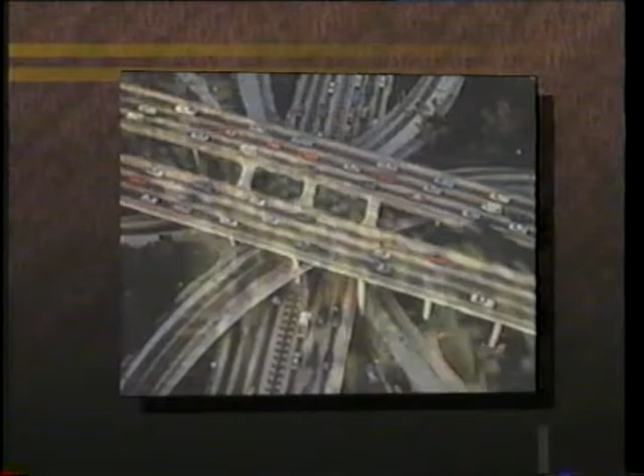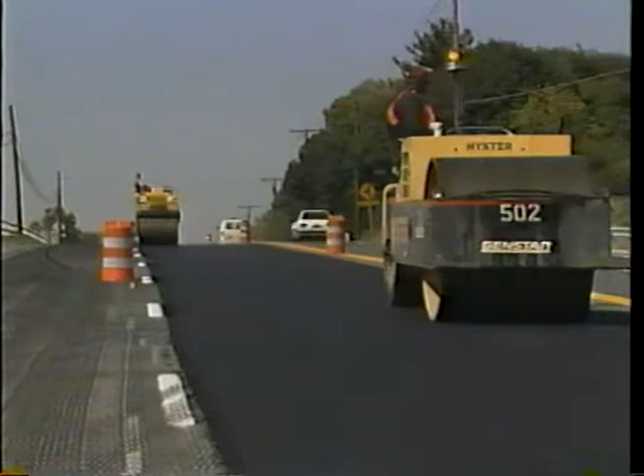For nearly a century, highway agencies and paving contractors have been constructing roads of hot mix asphalt, and with good reason. Asphalt pavements are smooth riding and long-lasting. Today, there's a new set of tools and techniques called the Superpave system that allows us to design even more durable asphalt pavements. Superpave, which stands for Superior Performing Asphalt Pavements, is the mix design system for the next century.

The Superpave system has two key components: performance-based asphalt binder specification and volumetric mix design and analysis. It also uses an improved method of laboratory compaction that reflects field conditions.

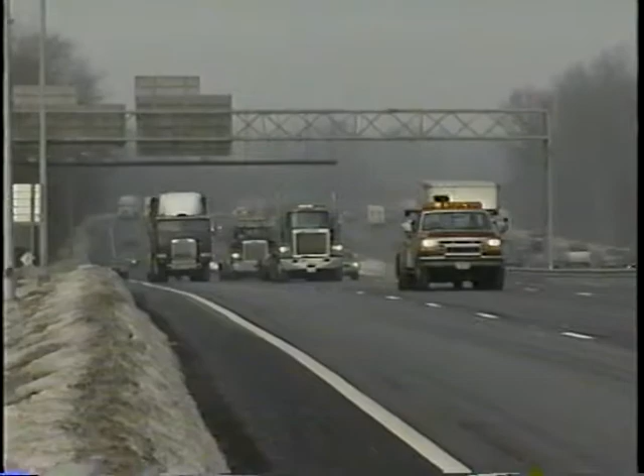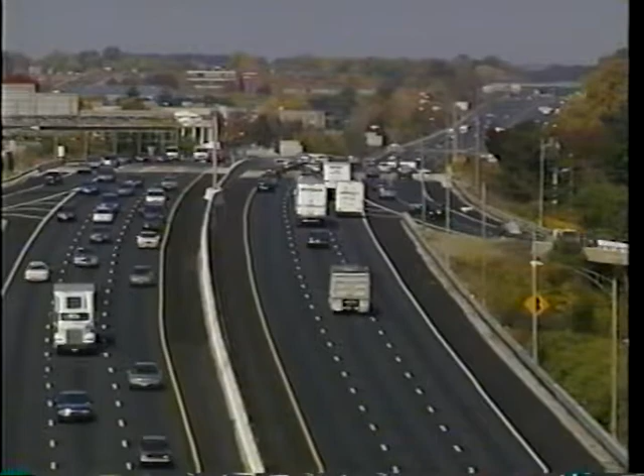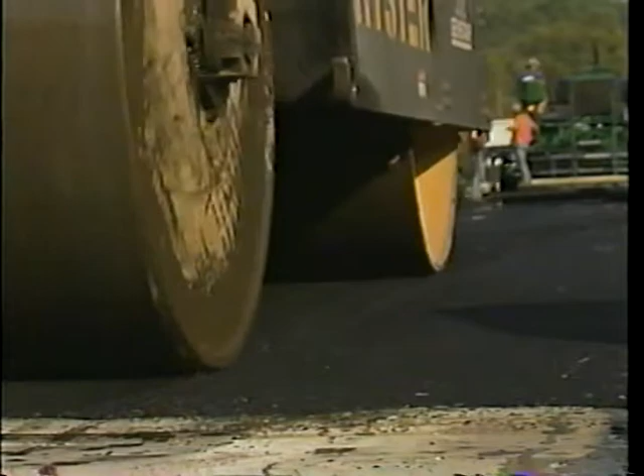Pavements take quite a beating. Not only are they subject to ever-increasing traffic loads and volumes, but they also must serve in a wide range of conditions. The Superpave system incorporates a new binder specification that classifies asphalt binders into performance grades based on a range of climates and pavement temperatures. The specification sets certain physical properties that all binders must meet, but the temperature at which those properties must be attained is determined by the specific climatic conditions at the paving location.

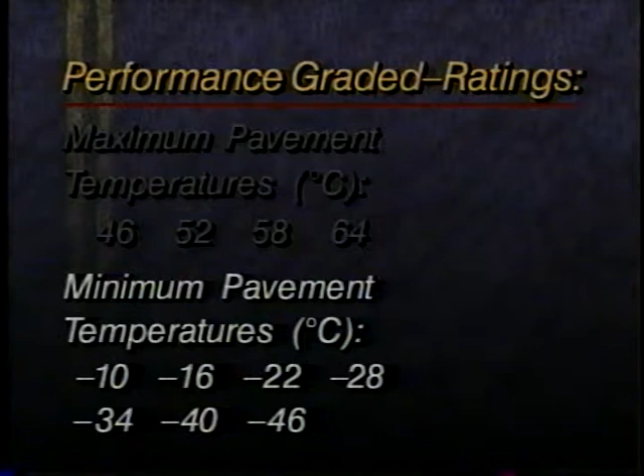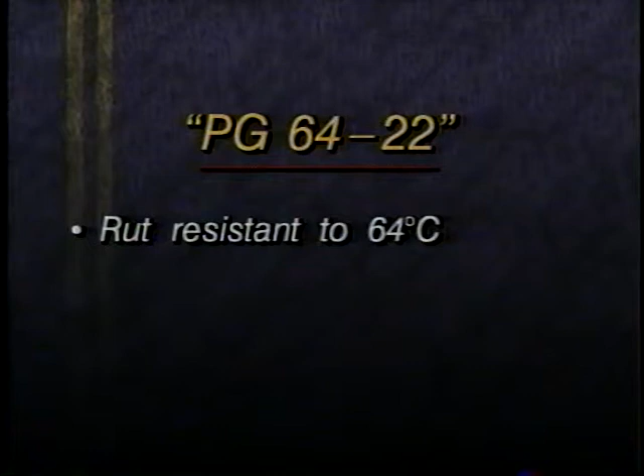Superpave binders are classified by PG for performance-graded ratings. The rating contains two numbers indicating high and low pavement temperatures. For example, a PG 64-22 binder used in a Superpave mix is expected to be resistant to cracks and ruts at pavement temperatures as high as 64 degrees Celsius and as low as -22 degrees Celsius.

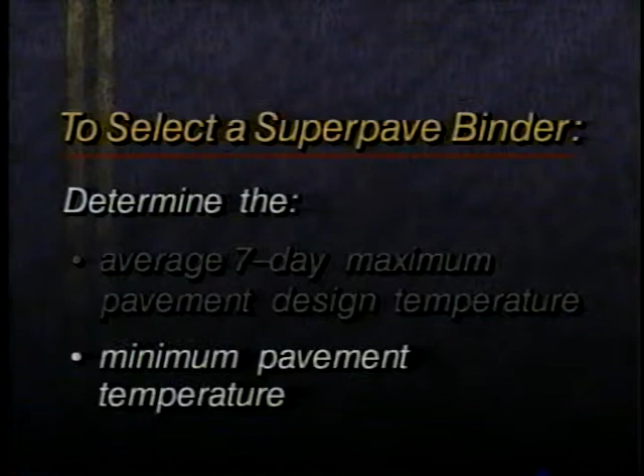To select a Superpave binder, you first determine the average 7-day maximum pavement design temperature and the minimum pavement temperature for a particular job site. To make this task easier, a weather database with more than 6,000 weather stations is included in the Superpave system. For pavements in extreme climatic conditions, some asphalt cements may have to be modified. But modified or not, a PG binder will have the required properties to perform as expected during the pavement's life. This is what is meant by a performance-based specification.

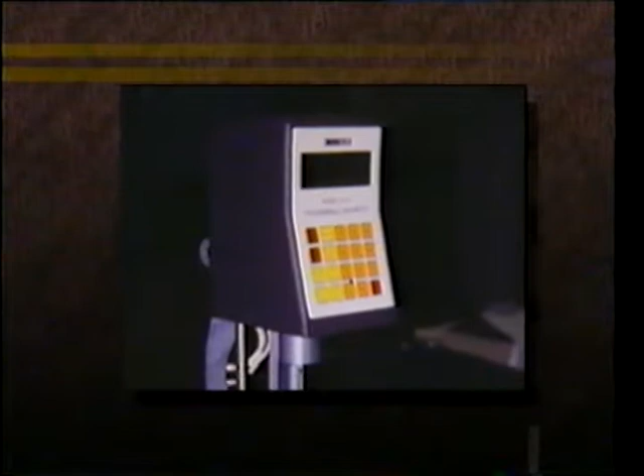Asphalt refiners and suppliers are converting to PG-rated binders. The conversions are being done on a regional basis in coordination with highway agencies' shift to the Superpave binder specification. Hot mix asphalt producers should be able to buy PG binder from the same supplier they currently use. Testing binders for conformance with the Superpave specification requires several new pieces of laboratory equipment, but the PG-rated binder requires no changes to standard methods of handling, storing, and transporting binders.

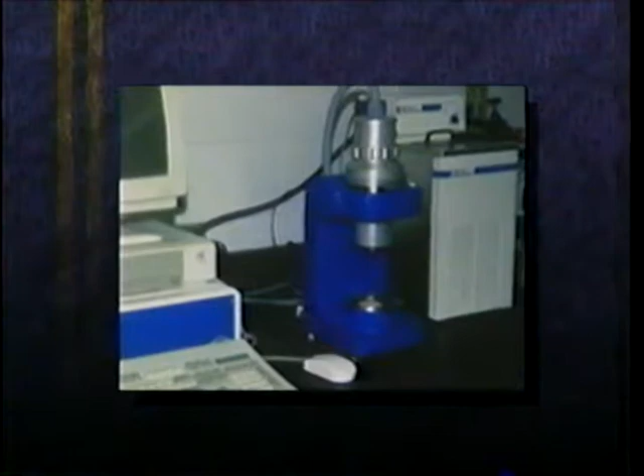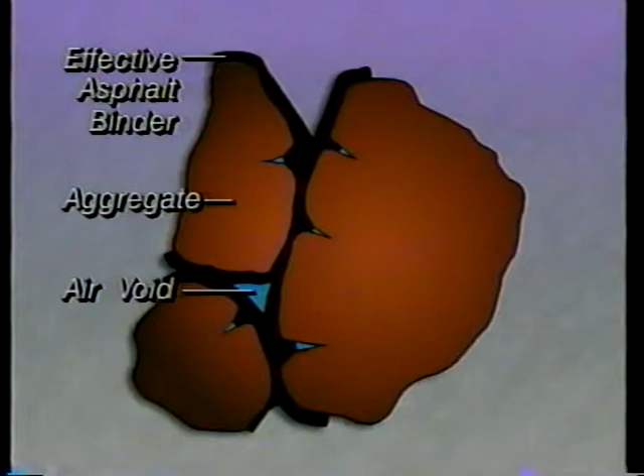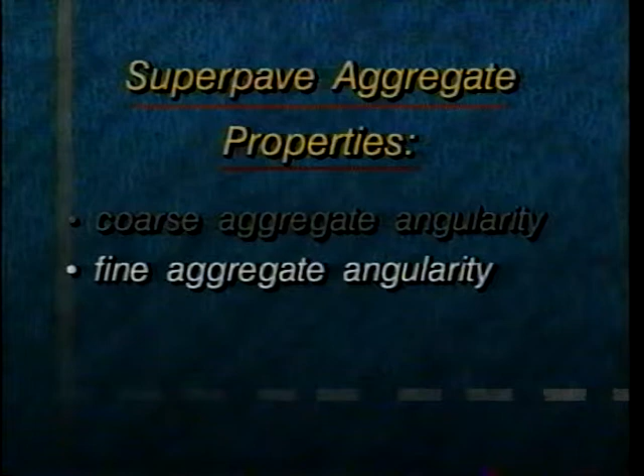Superpave mixes are based on volumetric properties. The characteristics of the aggregate and the volumetric properties of the mix, such as air voids and voids in the mineral aggregate, form the basis for selecting aggregate gradation and asphalt binder content. The Superpave system bases aggregate selection on consensus properties that apply equally at all locations. They include coarse aggregate angularity, fine aggregate angularity, flat and elongated particles, and clay content.

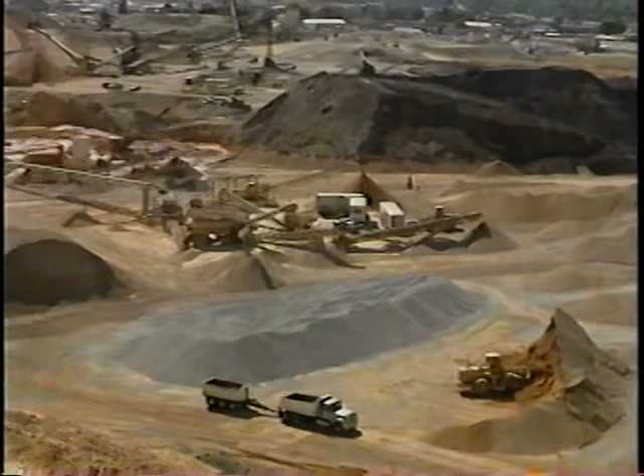In addition, each highway agency determines source properties in light of local or source conditions. Source properties include toughness, soundness, and deleterious materials. These tests for measuring aggregate properties are not new. Many highway agencies are already using the tests in conventional mix design. Switching to the Superpave system will therefore require little or no additional training in aggregate selection.

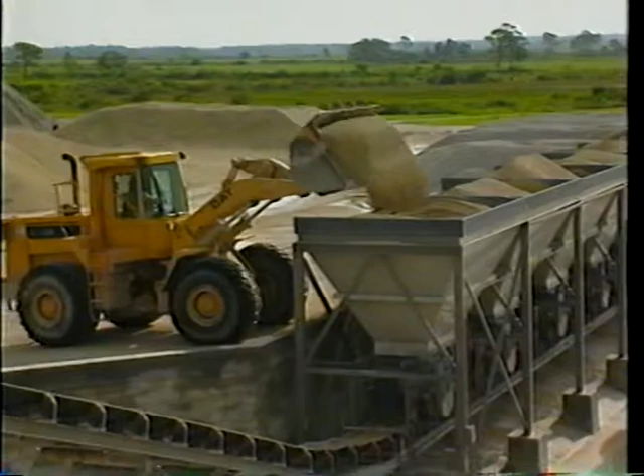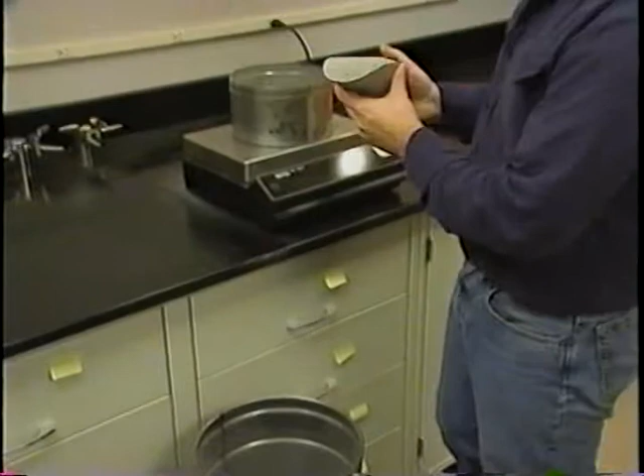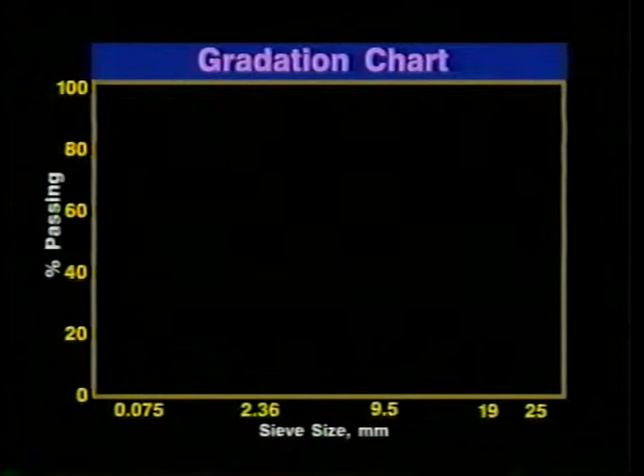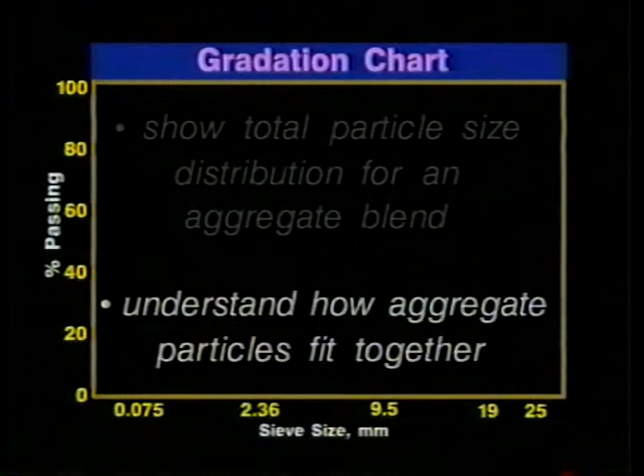To improve the properties of the asphalt mix and the performance of the pavement, the Superpave system provides a means for determining the optimum aggregate structure or gradation. The aggregate gradation process is a refinement of an approach already in use by many highway agencies. Gradations are defined using the Federal Highway Administration's 0.45 power chart. The chart can be used to show total particle size distribution for an aggregate blend. The chart is also useful for understanding how aggregate particles fit together. The maximum density line is plotted from the origin through the maximum aggregate size.

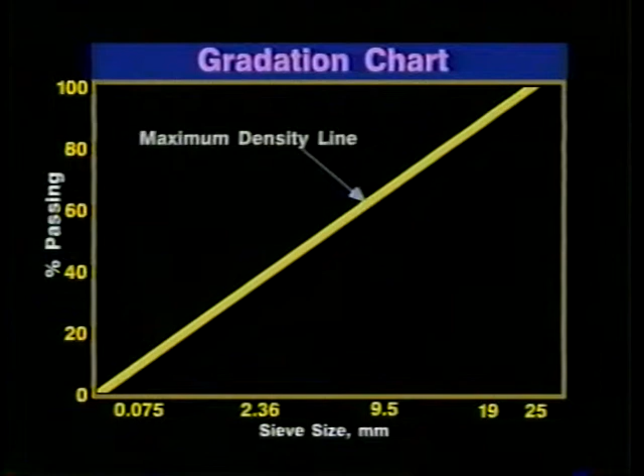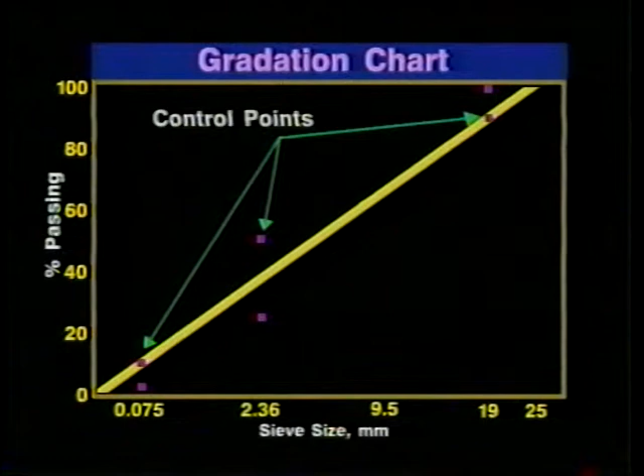The Superpave system adds two features to the 0.45 power chart, namely control points and a restricted zone. The control points serve as boundaries for the outer ranges of key sieves. Three sets of control points are plotted, one for the nominal maximum sieve, one for an intermediate sieve, and one for the smallest sieve. Aggregate gradations must stay within the control points.

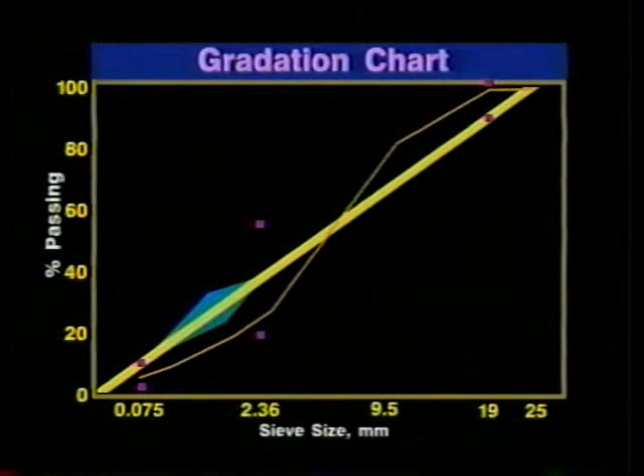The so-called restricted zone is actually a warning zone, providing a guideline for mix designers. Gradations falling in the restricted zone may have too much rounded natural sand. Mixes constructed using such gradations often experience compaction problems during construction and can be prone to rutting. For best results, mix designers should choose a gradation that falls between the control points and avoids the restricted zone.

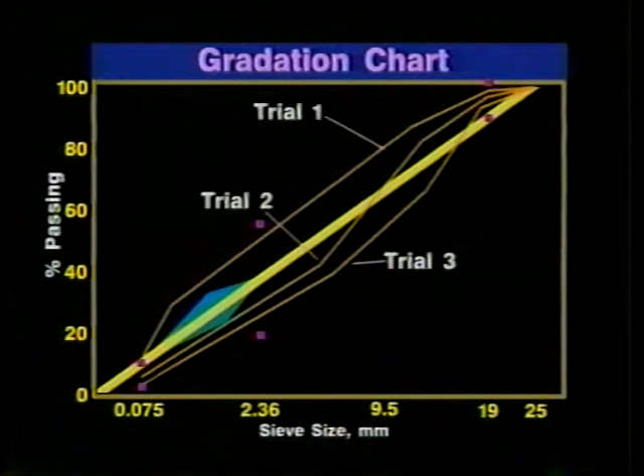The next step in designing a Superpave mix is determining the optimum aggregate structure. The aggregate sources are evaluated to develop 3 or more trial blends that meet the gradation requirements. Aggregate properties for the blends are then calculated. The appropriate PG asphalt binder is then mixed with the aggregate, and the mix is aged in an oven to simulate the aging that occurs during the construction process.

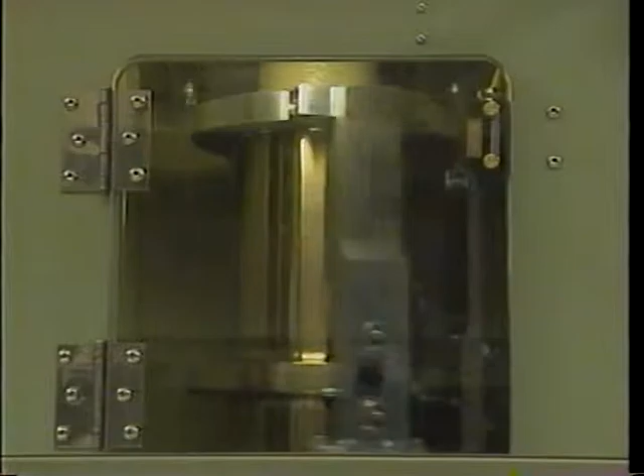The trial blends are evaluated by compacting the specimens and determining their volumetric properties. The Superpave system uses a new method of laboratory compaction, the Superpave gyratory compactor. The Superpave gyratory compactor is quiet and easy to use. It more accurately reflects field compaction, and research has shown test results to be significantly more reproducible.

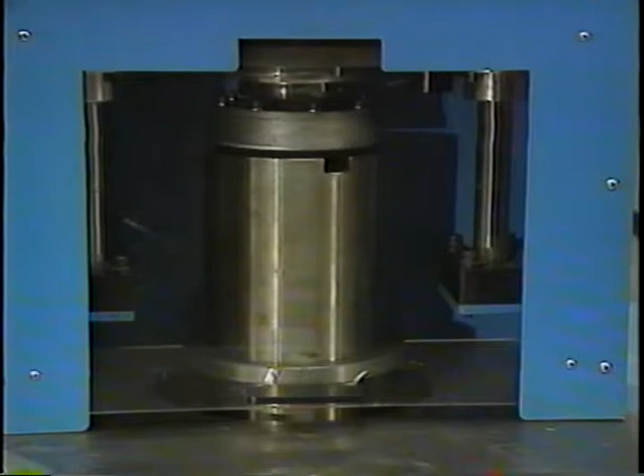The asphalt mixture is loaded into a mold 150 millimeters in diameter. A ram loading system maintains a constant pressure on the specimen. The mold is tilted at a slight angle and rotates while the load is being applied. The number of rotations or gyrations required for each specimen is dependent on the highest air temperature and the amount of traffic expected at the paving location.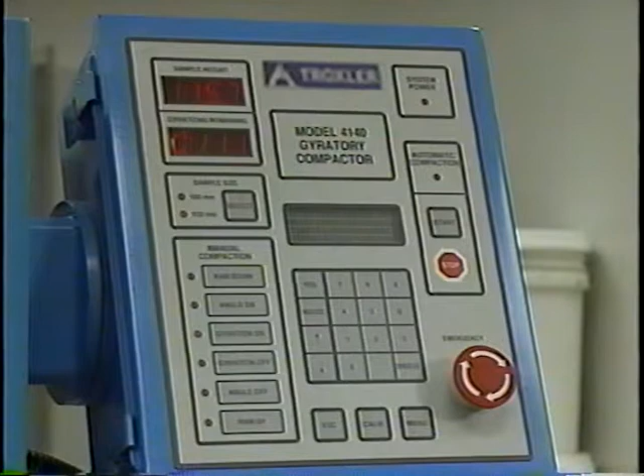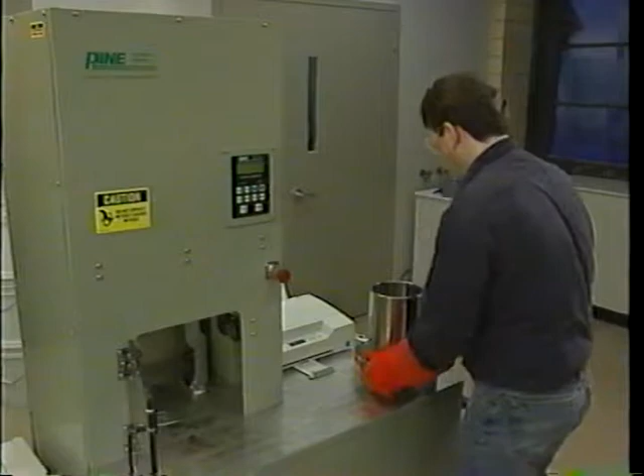During the compaction process, the height of the specimen is continually monitored, allowing the bulk-specific gravity of the specimen to be continuously calculated. Upon completion of compaction, the specimen is removed from the mold. The volumetric properties of the mixture are calculated, and the data are analyzed to determine which aggregate blend provides the optimum aggregate structure.

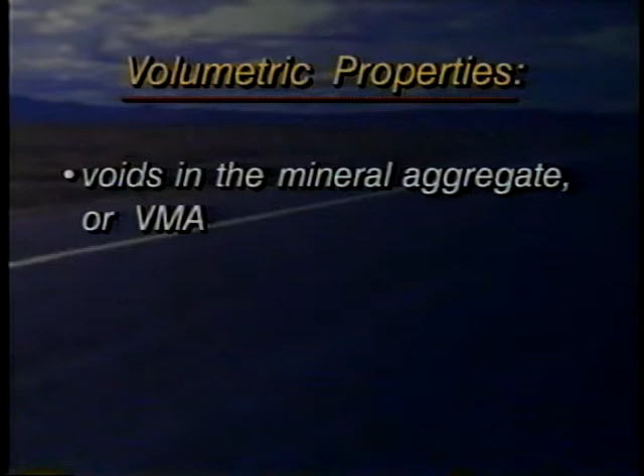Volumetric analysis is an integral part of most mix design procedures and is at the core of the Superpave system. Extensive studies have shown that volumetric properties are directly related to performance. Volumetric properties include voids in the mineral aggregate, or VMA, voids filled with asphalt, or VFA, and air voids. Controlling the volumetric properties in the field will ensure that the pavement will perform as expected.

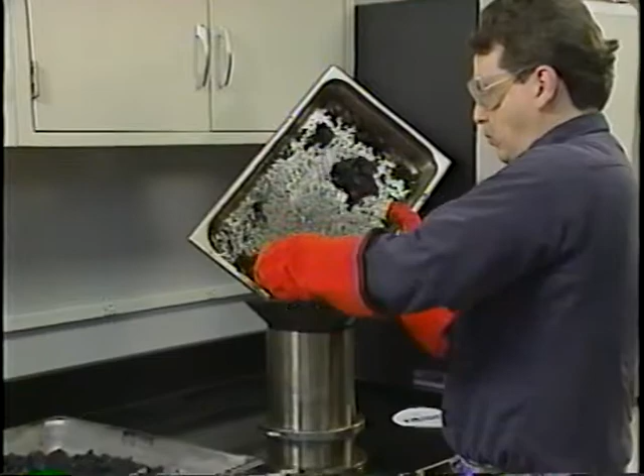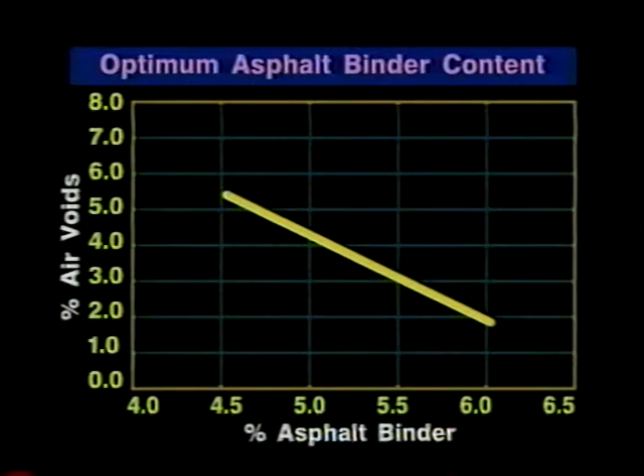The optimum asphalt binder content is then determined for the selected aggregate structure. Samples that have been prepared using different asphalt binder contents are compacted using the gyratory compactor, and volumetric properties are determined. The asphalt binder content that results in 4% air voids is then selected. The Superpave gyratory compactor can also be used for quality assurance at the construction site by determining whether the plant-produced mix meets the Superpave volumetric requirements.

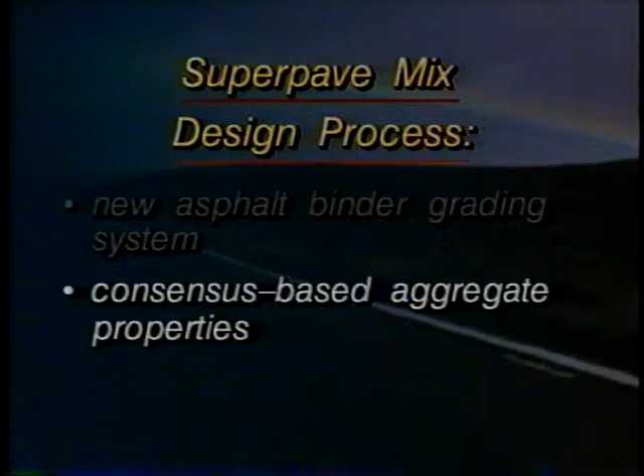As we've seen, the Superpave volumetric mix design process involves a new asphalt binder grading system, consensus-based aggregate properties, and a new method of compaction. The mix design process consists of 3 main steps. Select the aggregates, binders, and possibly modifiers to be used in the mix. Select the design aggregate structure. Select the design asphalt binder content.

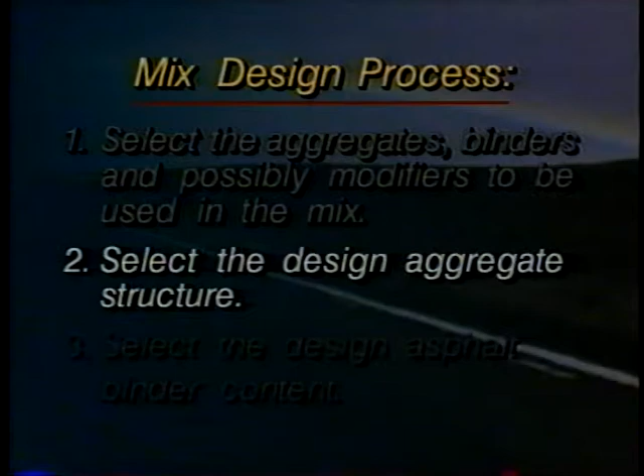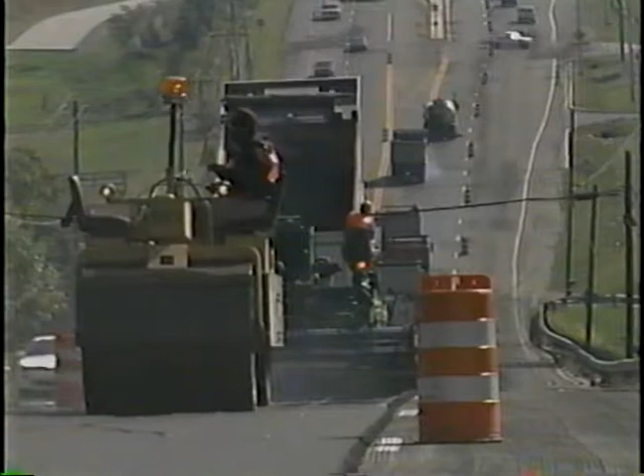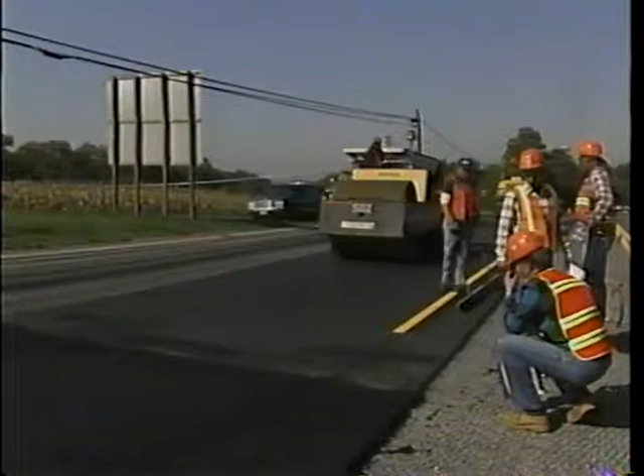Nationwide use of the Superpave binder specification is expected by 1997. The Asphalt Technical Working Group, which provides guidance and direction to the nationwide Superpave implementation program, has set a target date of 2000 for adoption of the Superpave mix design procedures. The actual schedule of implementation is, however, up to each state highway agency. Many highway agencies are already designing and specifying Superpave pavements.

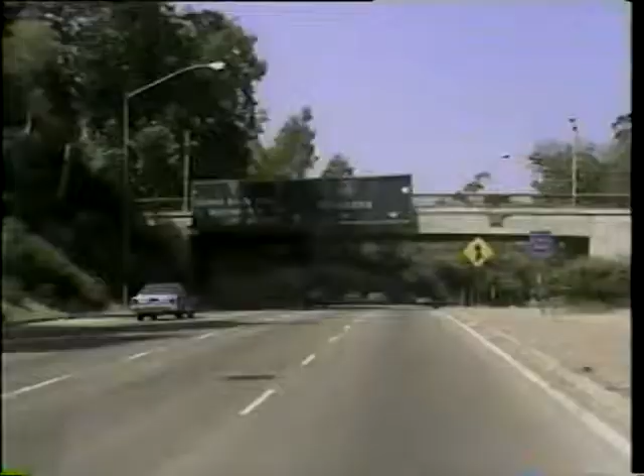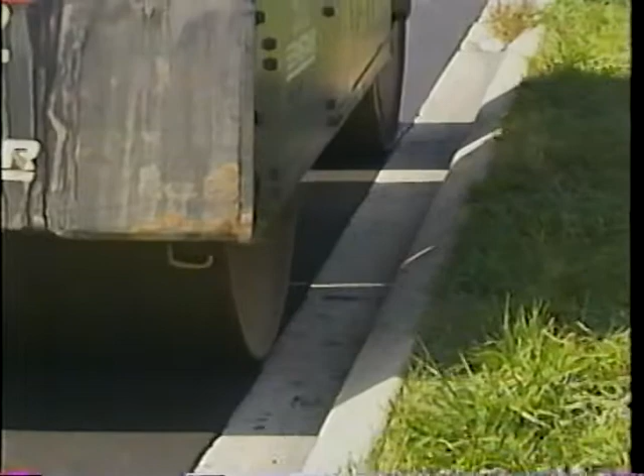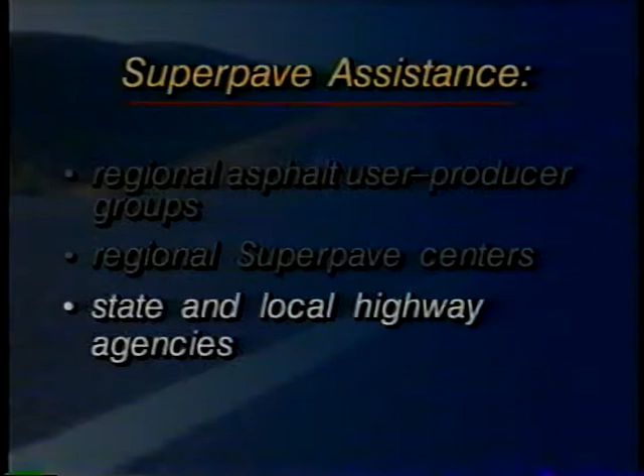The Federal Highway Administration is coordinating the transition to Superpave as part of its overall program to implement the results of the Strategic Highway Research Program. It includes training and technical assistance in Superpave binder selection and volumetric mix design procedures. Training and technical assistance are also available from a number of other organizations, including the Regional Asphalt User-Producer Groups, the Regional Superpave Centers, state and local highway agencies, National Center for Asphalt Technology, industry associations, including the National Asphalt Pavement Association and the Asphalt Institute, and universities.

Superpave is the next generation of hot mix asphalt pavement technology. It provides a new set of tools for designing smooth-riding, longer-lasting asphalt pavements. This advanced technology is ready to be put to use today. Superpave, the mix design system for the next century.